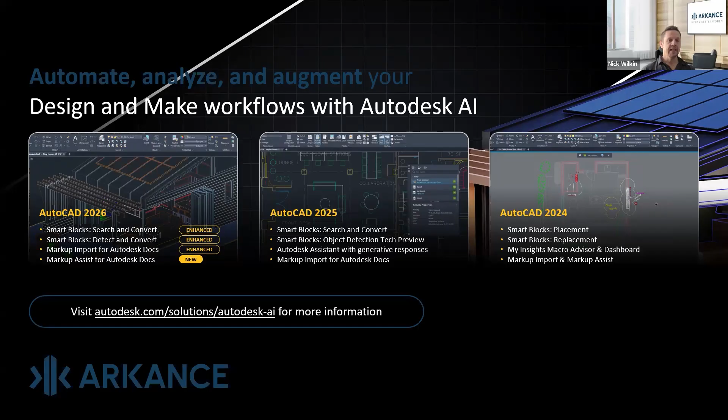All right, the next thing we're going to get into is the smart block detect and convert. So let me just turn the sound off here.

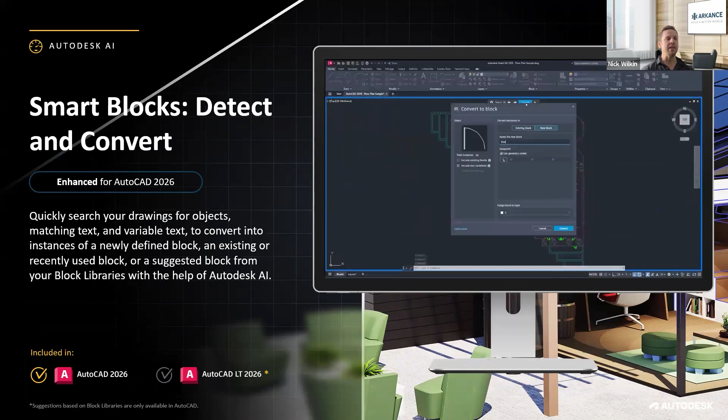The demo here is pretty neat, but I am going to go into this and give you guys a demo myself.

It quickly searches for objects in your drawing, matching text and variable text, to convert into instances of newly defined blocks. You select the objects you want to convert, and the AI will find those matching shapes, highlight them, and tell you how many there are.

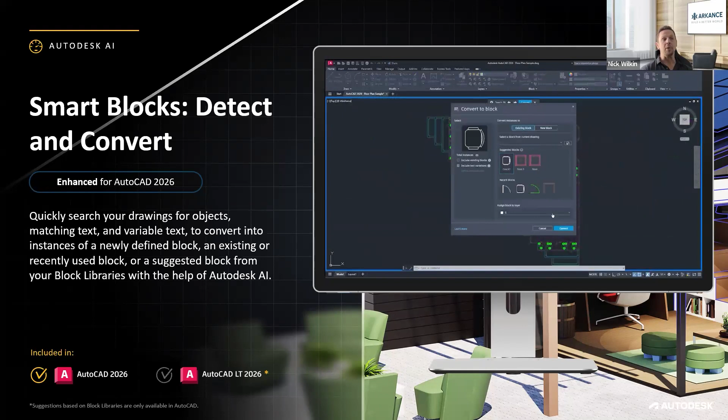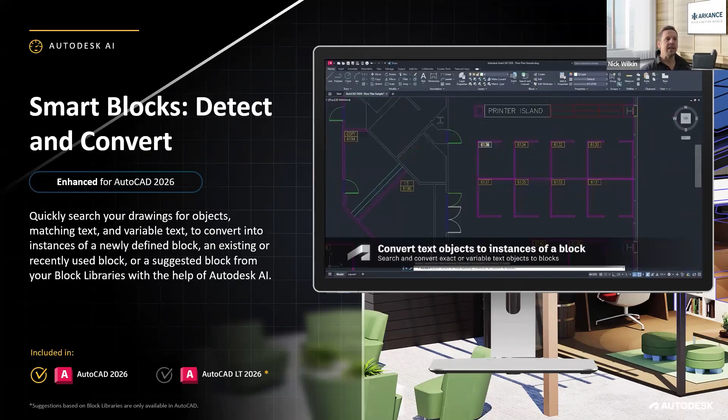So no need to take the shape and manually convert it into a block. You could open a drawing with multiple instances of, say, chairs, and take all of those instances and convert them into a singular type of block, which can save a lot of time.

Very neat. Noted that if you have things like attributes attached to those blocks, your attributes aren't really going to affect the function.

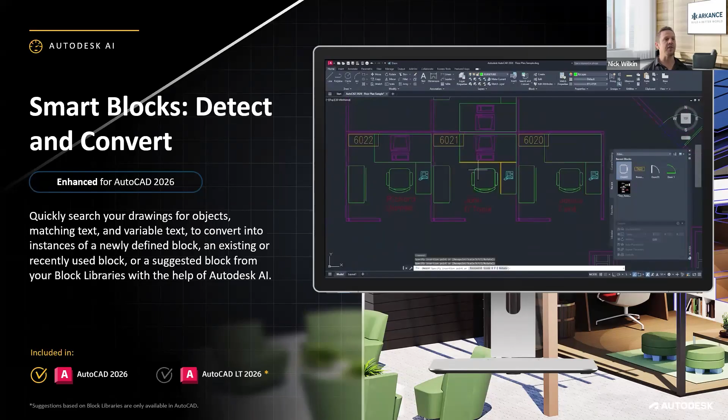Now, the reason I'm showing you the video and not just diving straight into AutoCAD is because this is in the testing phase, and AutoCAD actually admits to this. You'll see when I bring it up the first time there are two different functionalities here. This is the first one, and then there's also a second one, which is the smart block detect.

Detect and convert: this is going to detect them, and it's just going to improve your design efficiency and save you time. So this is slightly different. As you can see, that detects the blocks and then it lists them.

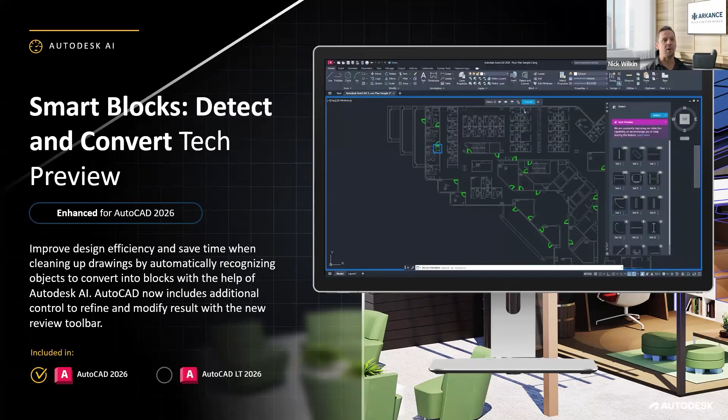Now, like I said, the AI is quite new, they've just introduced it. This is specifically why I'm showing you the two videos as opposed to myself just diving into it, because I've actually had instances where the AI gets a little bit difficult with me. AutoCAD does that with me sometimes. We have a love-hate relationship, as I'm sure you guys can relate to.

But what happens is sometimes the AI actually doesn't pick up the blocks, it doesn't figure it out, and it just sits there saying I'm searching, I'm searching, I'm searching. But it is early days, so I see good things to come with this.

With that note, here is my AutoCAD, just diving into it. You'll find that in your Home tab, on the blocks panel, they've added these two icons here. This is obviously 2026: detect and convert, search and convert.

So first and foremost, if I go to detect and convert, this is not going to search the entire drawing. Detect and convert - sorry, this one is going to search the entire drawing. The other one's not going to search the entire drawing.

So you can see this is the part that sometimes, and you'll see they're not shy about it, they say: we are constantly improving our detection capability, so we encourage you to keep testing this feature. Which I've been doing, so I've created this drawing in the background.

It's got blocks that are actual blocks, and then similar blocks, similar objects that are not actually blocks, they're just a set of objects set into place. And you'll see there, it's actually now detected some stuff, thank goodness. Not having a bad day with AutoCAD at least.

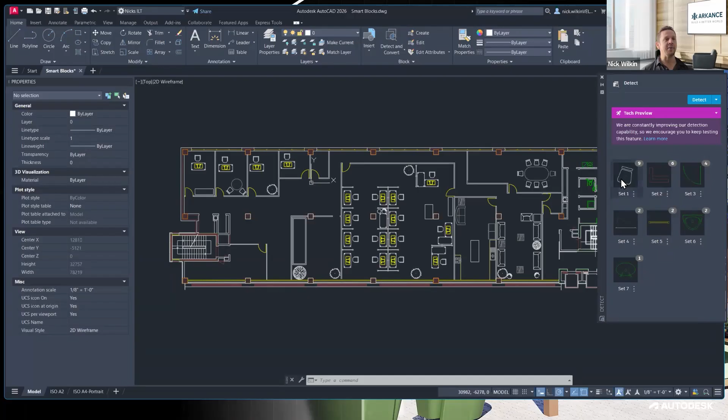And there I can set it. So I specifically set this one first up: these are not blocks. If I go around there, you'll see over here that much like when you make changes to an XREF and you've got your drawing compare, it's a very similar type of window. Here it is up here.

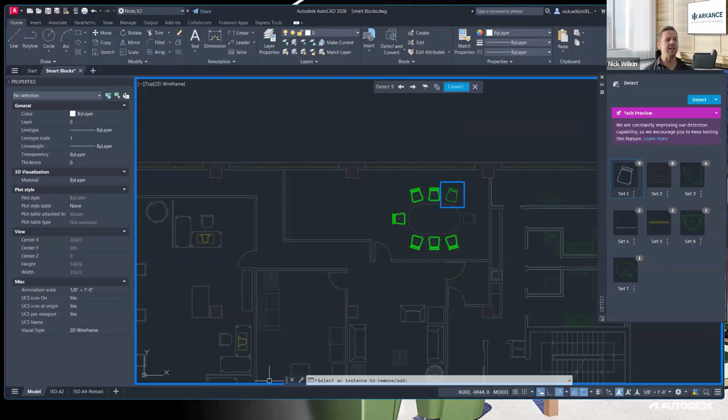You can see I can go to the next one and so forth. I can zoom out and zoom in, and you'll notice that it has actually ignored the block reference that I have, because this is already a block, and this is the detect and convert.

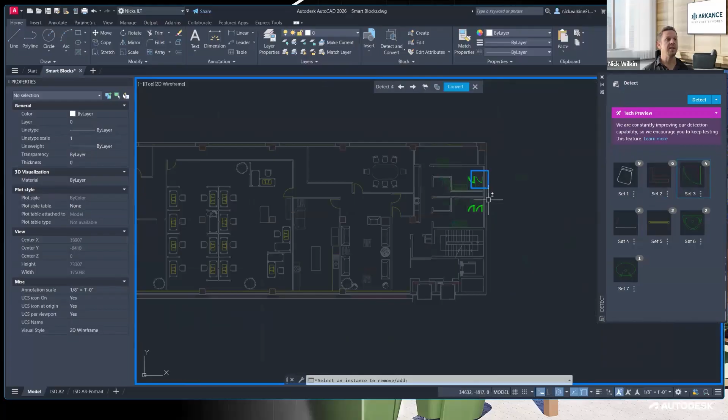So this is detecting that there is a shape that's common, and it's going to go and look for it. Now you'll see over here that there's other shapes that are common too, shapes that I possibly don't want to turn into blocks. But yeah, it will pick them up, including the door swings and so on.

There's 4 different door swings there that it's picked up, and there's other ones too. As you can see, there's quite a few objects here that I could actually convert to blocks. I've specifically done objects that are blocks in the drawing, like this one and the first one, and then I've exploded them just to see what happens and how it detects them.

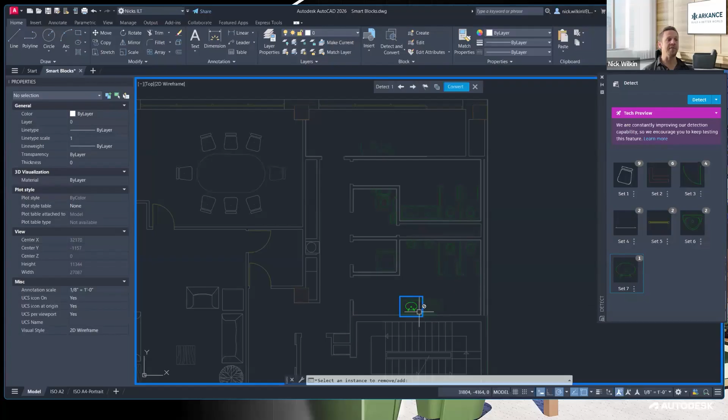So you can see there's actually a set of 7, or set number 7, and it's actually telling me there's only one off. So even though I've changed some of the features there - let's close this over here - what I've done is I've actually created these slightly differently, as you can see. And you can see that it detected this one as a singular block pattern, if you will.

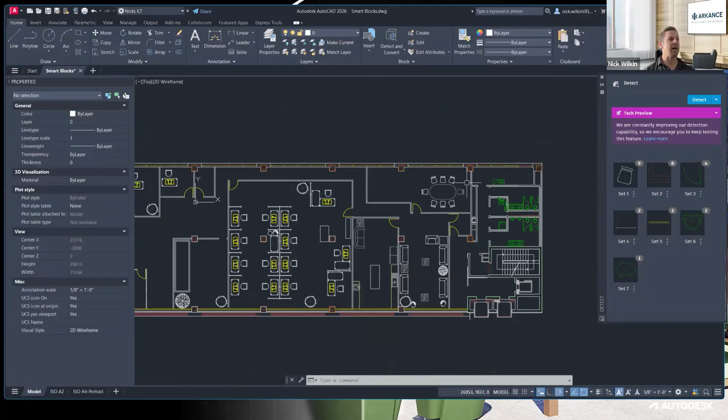And then this one would have been a separate one, but it seems to have missed that one. So yeah, some testing to be done on this, guys, but it's quite a neat feature, and it will save you a lot of time. Well, I reckon it's going to save quite a lot of time. All right, let's close that one.

Then the other new feature is the search and convert. This one, like I said, it's not going to bring up that automatic search function. What this one does is you select the shapes, press enter, and what it'll do is search the entire drawing for the available objects that are in there, and it will tell me the matching objects that it found.

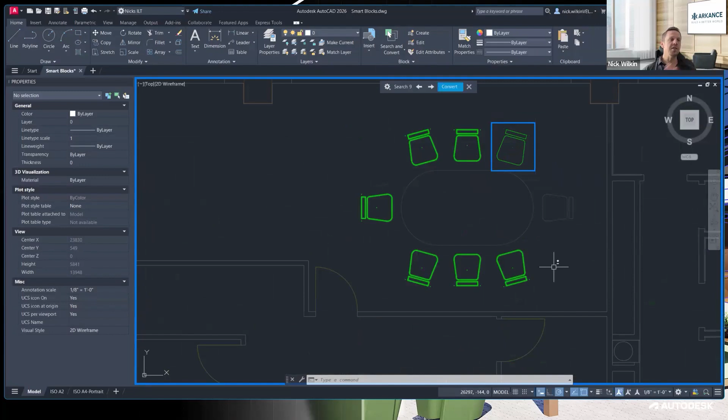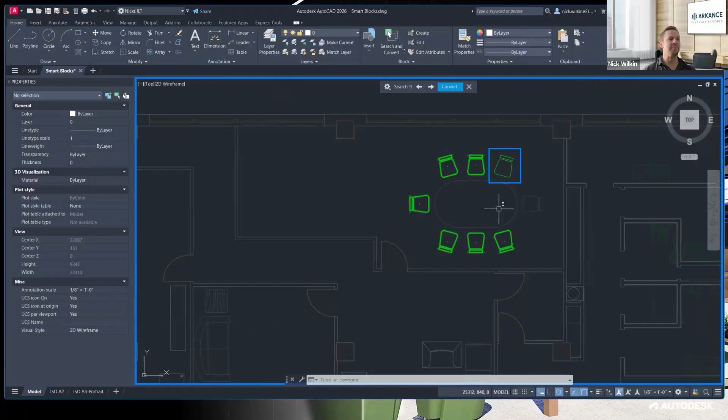So this one I feel is going to be a lot more applicable to our day-to-day as users. Because oftentimes I'll get a drawing where I've copied and pasted instead of creating a block, and then 12 iterations of that one shape or group of objects, and I go, I should have turned this into a block.

Now, this is a fantastic method. You can carry on, copy and paste, or you can pattern, and then you can actually say, okay, I need this to be a block, and you can just left click on convert. Then you can include existing blocks - there's an existing block over there. Include text variations, in other words if there's attributes and so on. Or you can click over here and rename this and convert it to a new block, right? So very easy stuff, very neat stuff.

And you'll see that I'm typing in chair because I think this one and some of the other chairs are actually already there. So chair 2 - it automatically picks up that I have got a block named chair. And then use geometry center.

I don't want to do this. As you guys know, the base point might be - if I do that, the base point will go to the 0,0,0 coordinate. So you do have the option here to pick base point. I can do something like that, pick the base point, and it will create it. Now, this is not the best option because it's at a funky angle, but still the same thing, just as a demo of this.

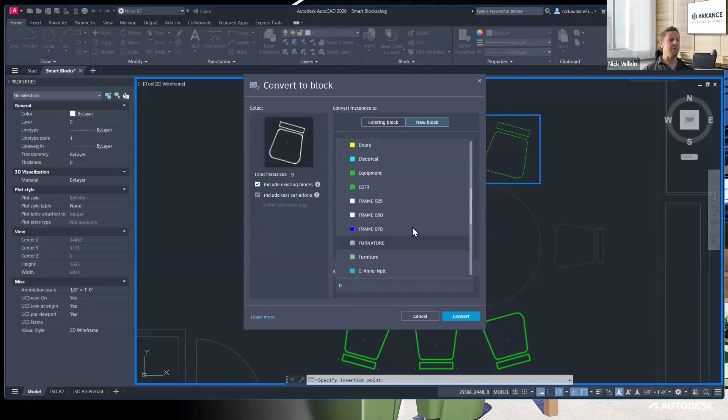You'll notice here that you can assign the layer. Any of you that have trained with me will remember I'd say you should always put your blocks on layer 0. So I'm going to leave it on layer 0 and convert that, and there you can see it converts all of those objects into blocks. Easy as that - fantastic tool, and probably the highlight of this release is this search and convert tool.

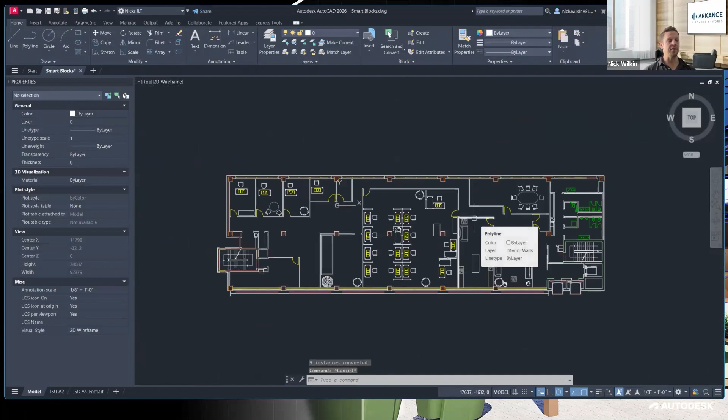Very neat function. All right, let's get back into the next area. So like I said, they are really focusing on 3 key areas.

Now, the next one is your connected experience. They want you to have improved web and mobile apps - they really are focusing on that as far as I can tell. I have done a YouTube, and I'll give you guys a link to that in a moment.

But you'll notice that you've got your AutoCAD desktop - you're going to log into your AutoCAD desktop. And then if you've got those login details, you can download the mobile app, which is a straightforward app on your phone. And you've also got the AutoCAD web.

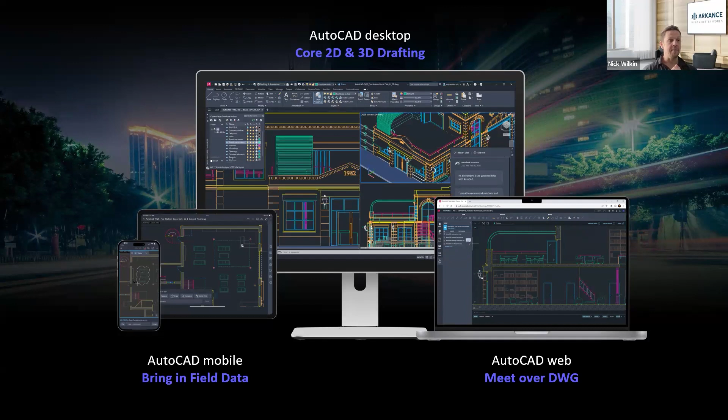Now, these are neat features because you can take this to site with you. You can take it to a client. I've actually done this myself - it's a very neat tool. You go to site, you open your phone, and you can edit the drawing that you're actually working on.

Just to note where these are found in AutoCAD itself, if you go into AutoCAD, you'll see up here - you might have noticed these before - you've got open from the web and mobile, and you've got save to web and mobile. You first need to save these files to web and mobile, right? And you'll see here, if I left click over here, it's actually going to open the web and mobile.

Now it's probably opened it off the screen. Yep, that's Murphy's Law. There we go. So that will save it there. Let's see if that'll happen again. You do, however, need to have this Autodesk account linked - save to web and mobile.

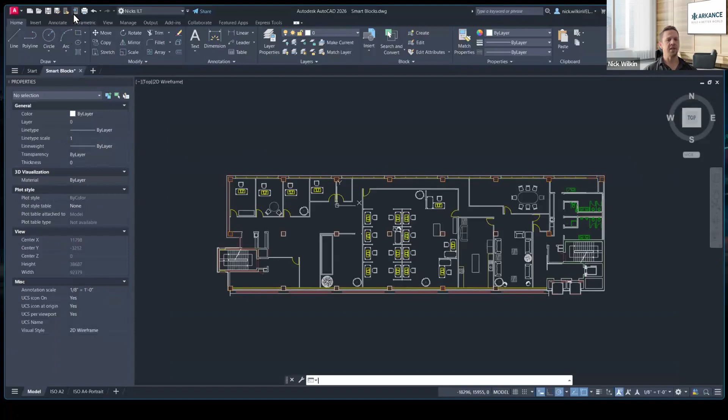Now it's automatically just saving it there, guys. So unfortunately, if I click on open to web and mobile, let's see if that'll open up. Yeah, let's just see, where has this disappeared to now?

But when it's installed, the feature allows you to save to Web and Mobile. This is going to be using either Autodesk Docs, or your Autodesk desktop connector. So it's going to be using your desktop connector, and the desktop connector is going to allow you to actually save this to the cloud. And that gets saved to the cloud. Therefore, because it's saved to the cloud, when you open the app and log in with your user details, it's going to allow you to use that. Very neat functionality, all right, so it obviously brings teams together, and this also enables you to share your drawings.

So that shared view is going to work in a very similar fashion. However, I find the web and mobile to be really fantastic. There are some small limitations to each of them. The web functionality is a little bit more clunky than using your actual app, but you've got all the features and tools available to you. Now, I'll say the same thing about the cell phone app, right, so you are able to actually get quite a lot out of that cell phone app.

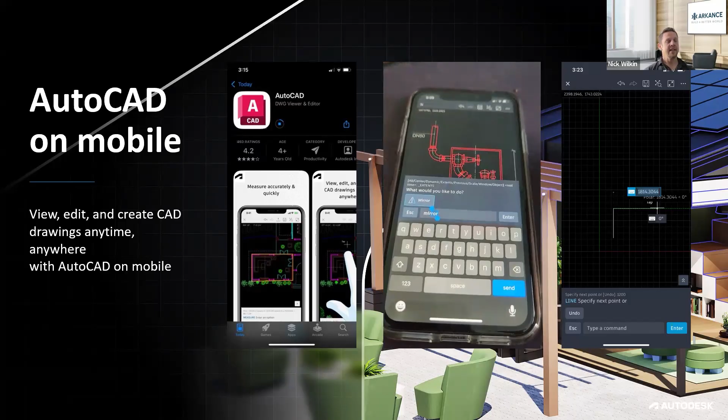And you can obviously, by using this, you can actually have functionality on site. So I've actually done this, this is my cell phone, it's my fat fingers there going ahead at it. And yeah, this is just a quick demo of how this works, right? It's a very neat function. And as you can see, your drags work the same, your selection options work the same, your zoom works the same, and all the tools have the same naming convention. So you don't need to train, you don't need to learn how to use it. It's a little bit of a step outside of comfort, but not really anything you need to learn new. So very neat functionality, and I found this to be very powerful, especially for site dimensions and so on.

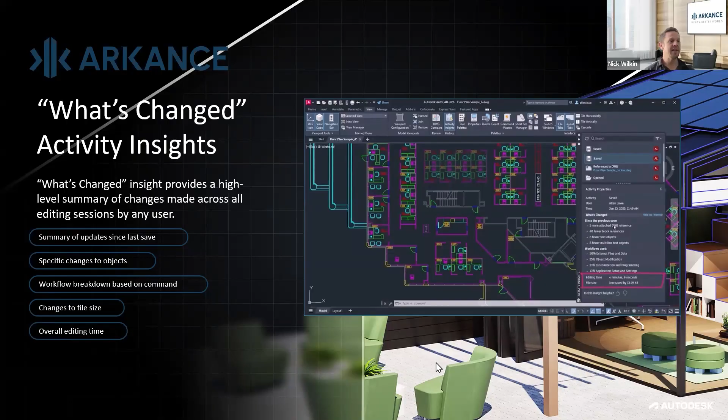Now, it's still not quite something where you can watch the workflow, but it will give you some revision notes - who did it, when they did it, how it was done - which I find to be quite powerful as well. Obviously I could have used this a few years ago, checking up on a couple of the appies.

Then tailored functionality, guys. In 2026 they're improving the App Store and your tailored functionality, and they're kind of promoting this. So what they're saying is customize AutoCAD to industry needs, and you guys will have probably realized they have indeed increased a lot here. In other words, they've added all the tool sets into your normal license agreement. So you have loads of tool sets like Plant 3D, AutoCAD Electrical, Civil 3D that I'm sure you guys are aware of, any of the guys that have been around for a while will know.

That was not available previously - you had to actually buy into those tool sets. Now they're available, and it seems they're actually doing something with the apps, right? So apps and APIs, third-party programs, they're looking at making those a little bit more accessible and easier to install. So I see good things to come with this.

If you guys have ever played around with your CUI, your custom user interface, those type of things - that area, with AutoCAD being in my opinion one of the most customizable CAD programs out there. It's quite obvious there's a lot of third-party apps with AutoCAD, and that's because I'd personally see this as almost an open source program, because you can really edit this program how you want to. Things like AutoLisp, changing the macros of commands, creating your own icons, and so on.

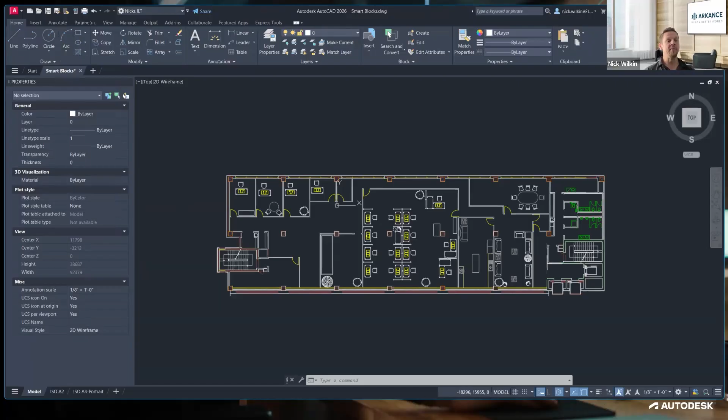Obviously I'm a professional user, I've been using AutoCAD for a long time - I wouldn't be hosting something like this if I wasn't, I would guess. But the point I'm getting at, guys, is you can customize this very, very much to your own requirements. So look into that - if you're a long time AutoCAD user, I would recommend that definitely.

But things like electrical design, I find a lot of clients, a lot of users are not even approaching that topic - they're trying to get everything into AutoCAD itself. I would strongly recommend that you actually look at the architectural toolset. You don't have to buy Revit, you don't have to buy Inventor to get some of the features you actually get in those programs. Sure enough, it's not going to be the same capacity of productivity, but really look at these specific to your discipline.

Map 3D is very popular. Civil 3D is really popular.

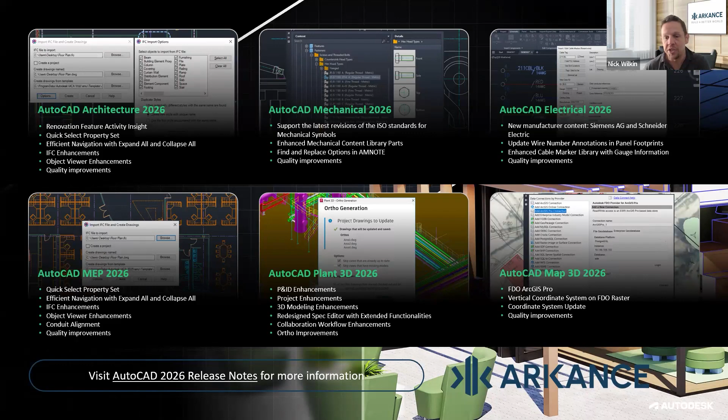All right, guys, I see there are a couple of questions. Obviously, I'm going to change over now to questions. That's pretty much it, that's pretty much all the enhancements. I know there's not a lot this year, but still some really neat enhancements with AutoCAD 2026.